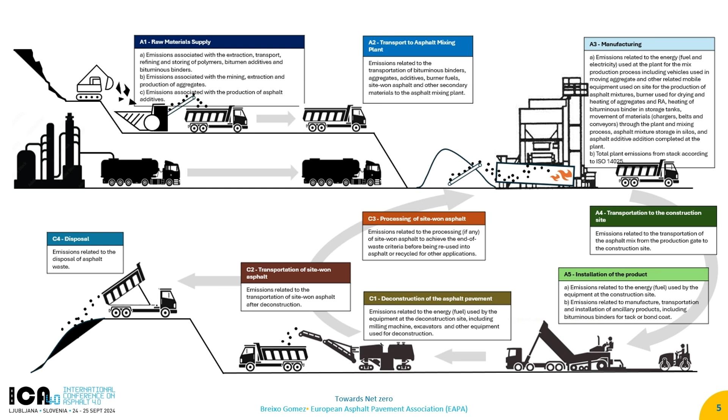What we haven't included is because at the moment we don't have provisions about the impacts of the use stage, so impacts of maintenance, service life, and these kinds of things. This we haven't included in this study. And it's a pity, because honestly, I think that digitalization is one of the areas where it could contribute the most.

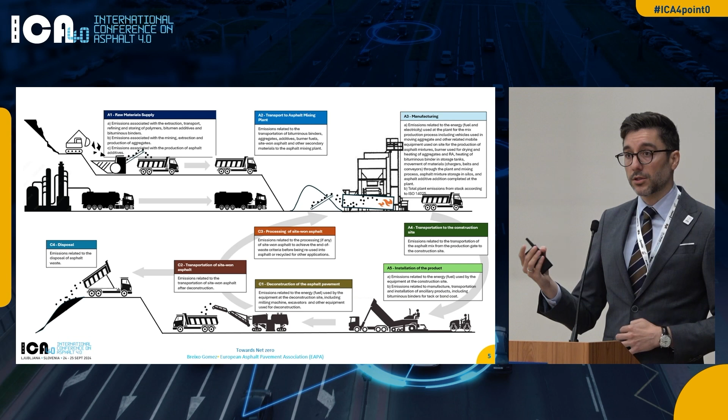Have pavements that have more quality, so extended service life, and optimized or reduced maintenance. For example, with technologies like we saw from XOUBA, using data from vehicles to optimize maintenance. So all these kinds of impacts are in the EPD terminology, module B, and unfortunately we couldn't include it here. Still, we will see that digitalization can help in other areas of this service life.

Something important is that at the moment, the results show that the production of asphalt mix, up to the gate of the asphalt plant, to produce 1 ton of asphalt on average in Europe, we need around 50-55 kilos of CO2. And if we include impacts beyond the asphalt plant, so transport, installation, and end of life, then we are around the value in red there, around 65 kilos of CO2 per ton of asphalt.

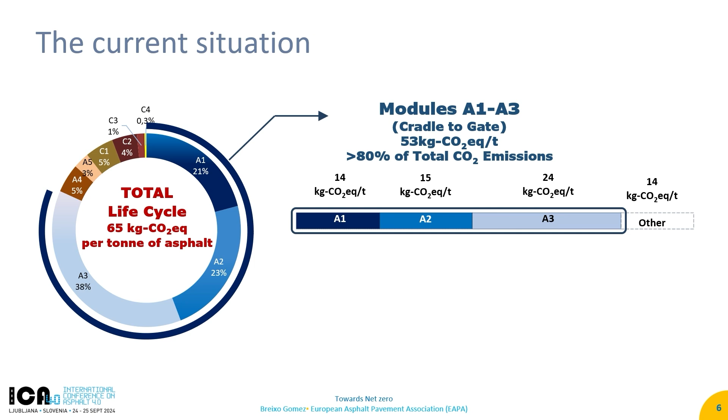Something important is, if you see just modules A1, A2, A3, this cradle to gate, this 50-55 kilos represents already around 80%, or actually more than 80%, of the total CO2 emissions. This means that everything we can do to reduce emissions during manufacturing and raw materials is already going to be tremendously impactful. It's going to be good to reduce emissions, and this is why we focus more on that.

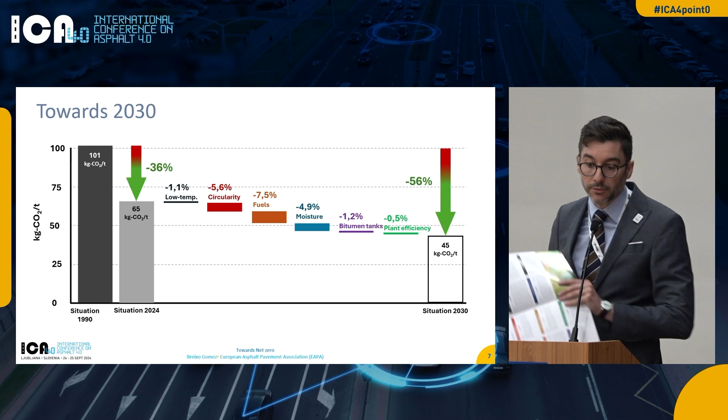So as I said before, knowing where we were, the first column, and where we are now, we see that already we have a reduction of 36% nowadays. And then where we have to be in 2030, we found a combination of levels of implementation. I won't get into a lot of detail because everything is in the document, and I really encourage you to have a look at that.

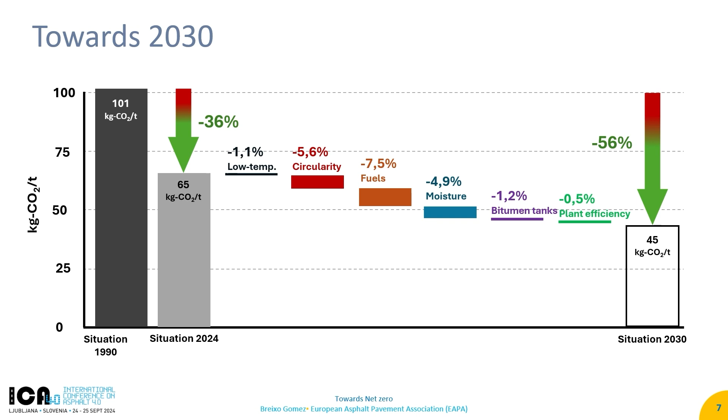We found a combination of different technologies that are feasible for 2030. For example, here we haven't included use of electric trucks or things like that, probably we won't have in just 6 years, or at least it won't be the main case in Europe. And then we repeated this for 2050, and there we did include more things that we are expecting to happen because it's a longer wait.

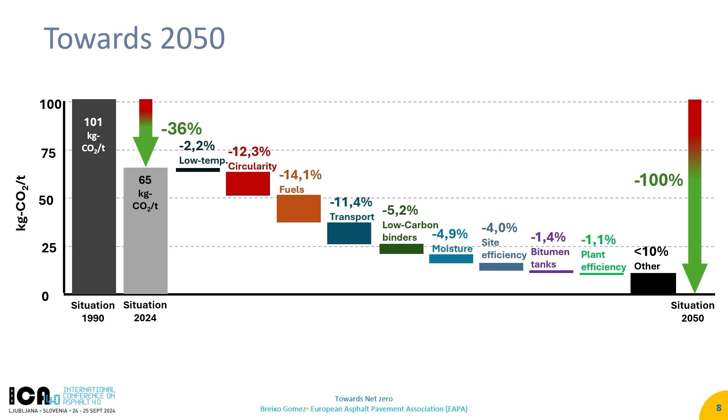So, and if we see this, again I won't get into a lot of detail, but where could digital technologies impact more on this? What we think is especially to make the asphalt plant more efficient, to make the transport of materials more efficient as well, and to make the operations on site also more efficient.

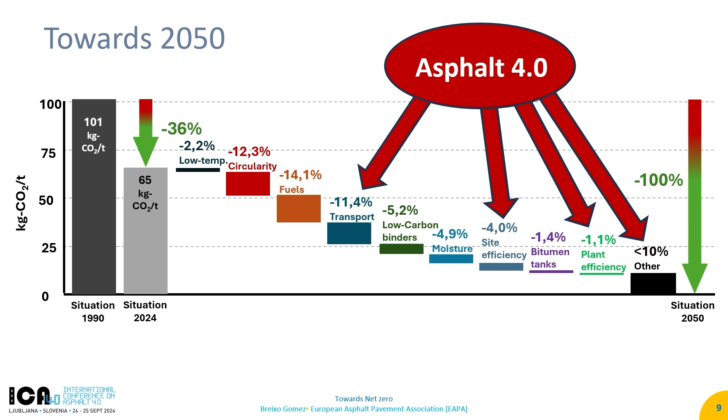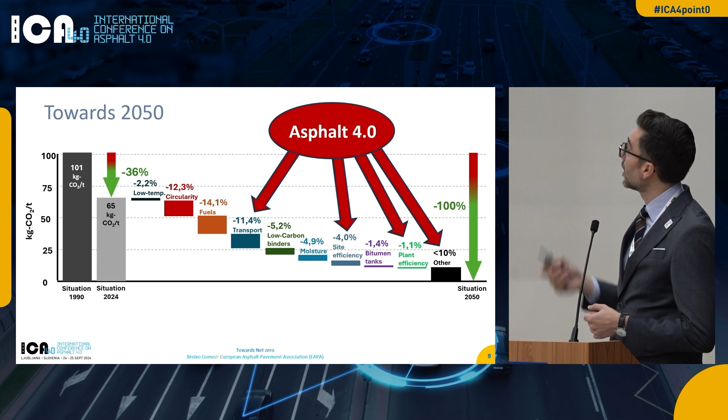Also, we have this section of other, because our objective was to reach our emissions reduction at least 90%, because we consider that there will be a 10% that will be covered by other things that we haven't included in this study, but that will happen also over this time. For example, the reduction of emissions to produce electricity or this kind of thing. So it's not something we will do in the asphalt plant, but it will happen somehow, and it will help. So digitalization also has potential to act in this.

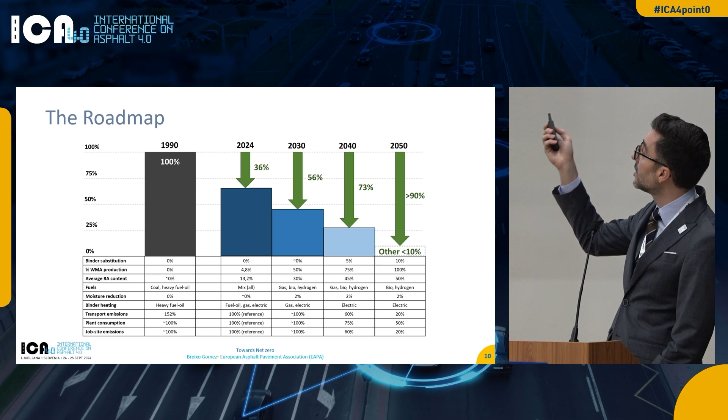This is the roadmap, I invite you to have a look at that. So this is how in different years the levels of implementation of different technologies progress.

At the end of the document, you will also find, for example, some sections where we say that there are impacts that the road can produce that we cannot show in the EPD. For example, we know that through maintenance or the selection of an optimized low rolling resistant surface for pavements, we can actually reduce emissions from the cars. So this is not something we will show in our EPD because it's not emissions coming from asphalt, but it's something that can contribute to decarbonize other sectors, like the transport sector, one of the most emitting sectors, by the way.

And we also have a call for stakeholders to help us do that. So it's a call for ourselves, for the industry, to develop a series of things. A call for the administrations, and here we talk about regulations, standards, sharing risks, sharing responsibilities, green public procurement, all these kinds of things. And then also a call to other third parties, for example, to decarbonize energy production, to decarbonize transport. We need decarbonized vehicles for transport, for example, or to supply raw materials that have lower impact, so from the binders to aggregates, etc.

So I invite you to have a look at that.

Traditionally, road geometry is measured with a standardized approach using a mobile platform containing an odometer, an angular transformer, and an accelerometer. These three components usually serve to calculate the IRI factor, the roughness index, but they can also be used to estimate the profile along the road, so the longitudinal profile. This is a one-dimensional approach, but since the platform is moving, we can also do it under traffic.

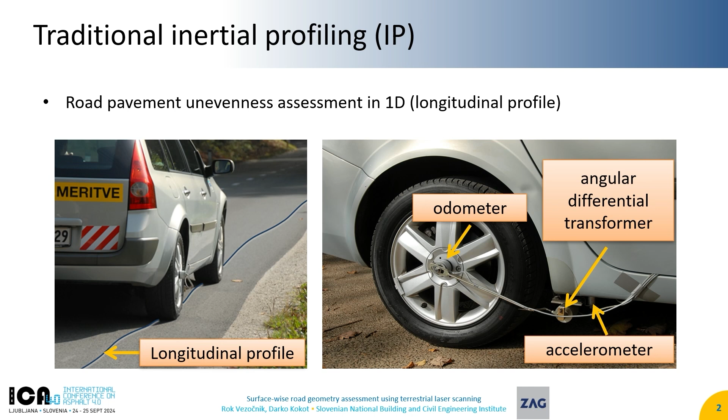Compared to this 1D approach, there is a relatively new technology developed in the last 10 to 15 years, laser scanning, or as you may know it, the LiDAR approach, which uses an instrument with its own lighting source.

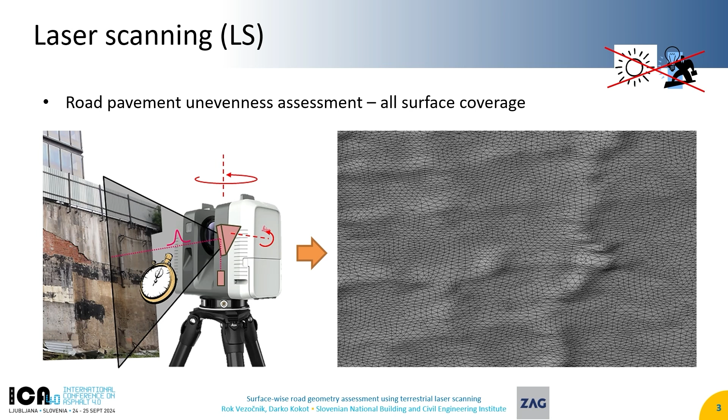It does not require an ambient light source such as the sun or anything else. It can also operate in total darkness. So basically it works like this.

On the left side you can see the instrument. It has a laser source - the smaller red square. The laser emits different pulses, and through a very sophisticated mirroring and rotating platform, these pulses are sent out into the environment, reflected, and returned back to the instrument. This is done very fast, and the instrument measures a huge amount of spatial points, measuring spatial angles and the distance to the object.

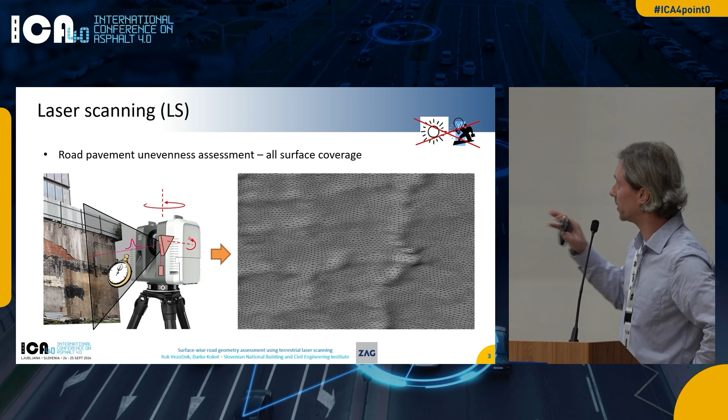With such an instrument, one can obtain a very precise, dense, huge amount of points, which we call a point cloud. On the right side, you can see an example of a zoom in on a road surface with all the bumps. This is not a point cloud, it's actually a mesh - a triangulated mesh, which was obtained by this type of system.

Additionally, the instruments also measure the intensity of light and the RGB values if the instrument has a camera on top of it or inside. These are all information that you can get within a couple of minutes. The next three steps - synchronization and transformation, filtering, and surface modeling - are not so well automated. They need human intervention.

With synchronization and transformation, I refer to the fact that these instruments are not able to see behind obstacles. That means you have to place additional stations with the instrument in order to completely cover an object that you are investigating. This synchronization refers to having to then synchronize these different locations within one common coordinate frame, and then you place it in the final coordinate frame - some local coordinate frame, or even the one that individual countries use.

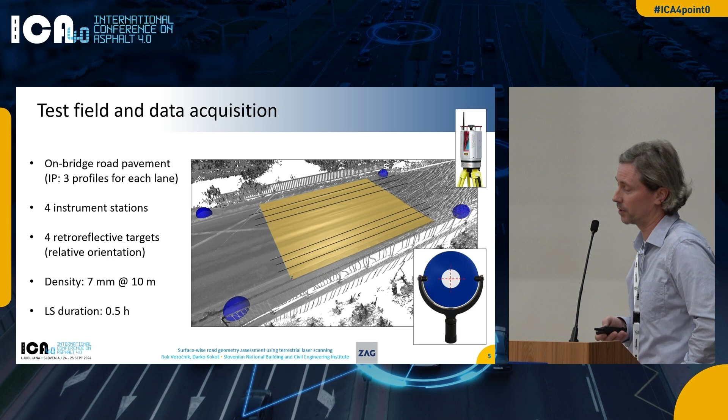In this short presentation, I want to also tell you that we carried out a small test very close here to Ljubljana, in which we measured a small section above the bridge with the traditional profiler. You can see the 6 black lines - these are the lines in which the inertial profiler was measuring the road.

We also scanned this area from 4 different locations, seen here with blue dots, to combine different locations. For these 4 different locations, we used retroreflective targets. This is standardized equipment, and we chose the highest density with this Riegl instrument, which was available.

This is quite an old experiment. Nowadays, you can have instruments that are able to produce even denser point clouds than this one. But the density that we chose was 7 millimeters in both directions at the distance of 10 meters, just to give you an idea. The whole campaign took half an hour, including the drive with the profiler. Our aim was to see whether this terrestrial laser scanning, being a surface-wise approach, can be beneficial compared to the one-dimensional inertial profiler.

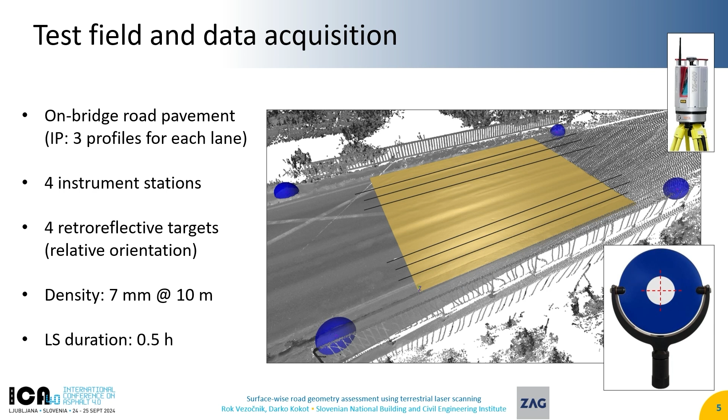So from the laser scanning point cloud, we first did the steps which I already described. We placed the point cloud in the coordinate frame, and we filtered out the traffic because this was done under traffic conditions, so we had to filter out the cars and all the silhouettes that the traffic was producing.

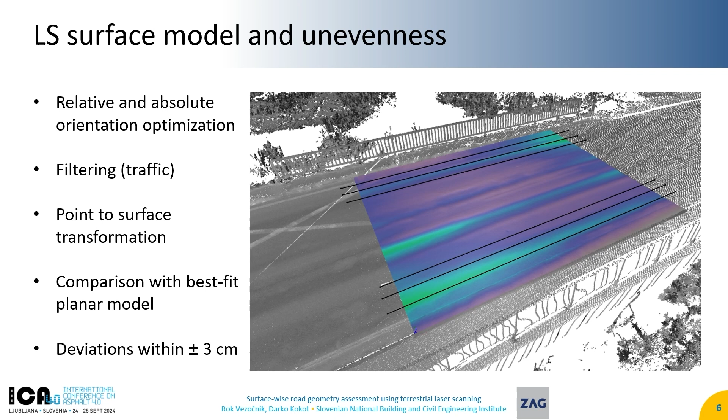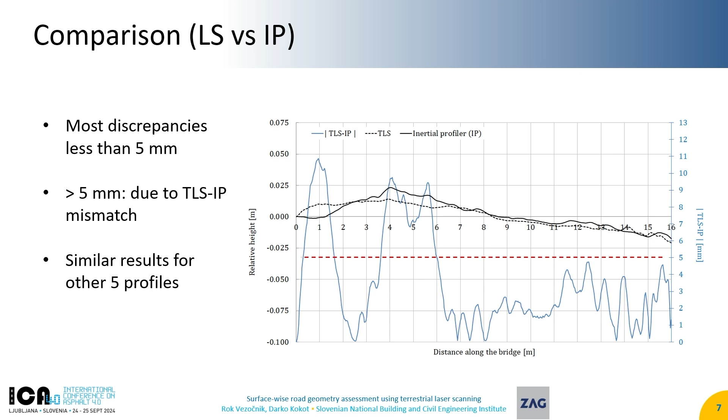Based on these results, we have decided that it's quite useful to have this kind of full surface coverage results, because they are quite reliable and can be used for different applications - for example, some complex simulations, one of which I show here as a reference.

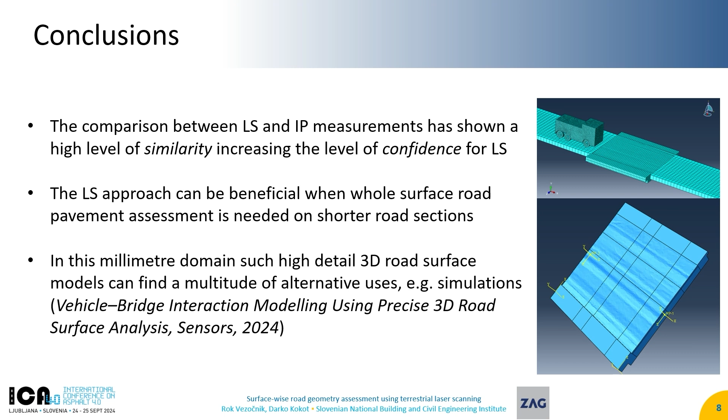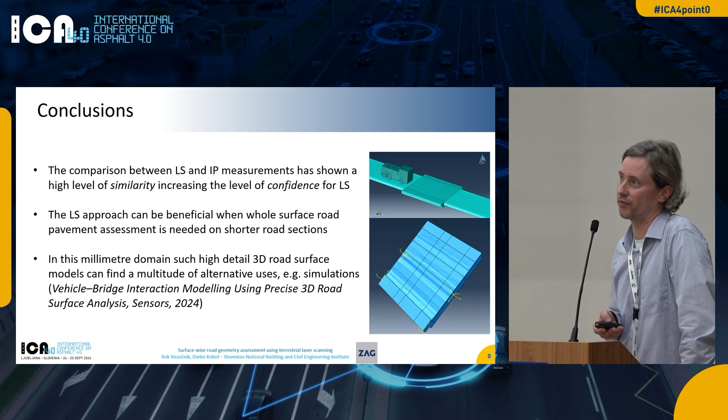We produced an article which used this very precise road model from the laser scanning in simulations of how the vehicle crosses a bridge, and how, because the bridge is equipped with sensors, it also measures the response of the bridge when the vehicle is passing over. This simulation was done not with a simple road model, but with this kind of sophisticated model. So in the end we have managed to show that for shorter road sections, since this is a static laser scanning, such models can be used not only to be in the same quality category as the inertial profiler, but they could also be an advantage when trying to perform more high-level tasks or comparisons of monitoring road geometry.

So that's my talk, I guess. If you have some questions, I will gladly answer them.

Otherwise, I don't want to be too long, because I think we're supposed to be 10 minutes or so, right? Yes. Is there any question? Please. No questions? Okay, well, maybe Andrew can have some time.

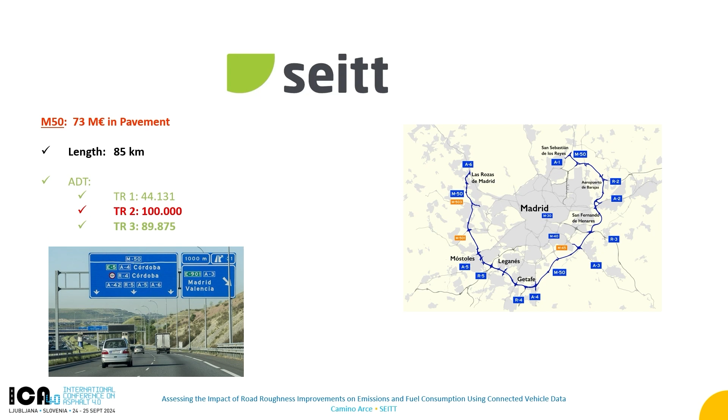As you can see, 85 kilometers, and the AADT is almost 100,000. That's plenty of traffic. If any of you go to Madrid, you will see there's plenty of traffic, a lot of traffic jams in the morning and in the evenings, as people travel to their jobs and to their houses. So it's a really important network.

So what is the process of this project? First of all, this summer they did the pavement works. So we first have to segment the road, then do the data collection. Well, technically the data is in the cloud, so we only have to access it.

Then we have to estimate the fuel consumption and CO2 emissions. We say estimation because we don't have the complete fleet, but when you have the data, you calculate, you don't estimate — so we calculate the bias that we have.

We are collaborating with the Spanish traffic entity, DGT. They put some traffic counters that read the plates of the cars, so we know the ground truth. Technically, we know the real traffic of the roads, and also we know the type of engines they have, if they are hybrid, petrol, or electric cars.

So we have the bias, that is our connected vehicle data, and we have the ground truth, so we can compare what is happening in one and the other. Then we make the analysis, and finally the before and after comparison.

Sadly, they finished the works less than a month ago, so we don't have the after results, but we hope they are going to be really good. So we are going to focus on the before analysis.

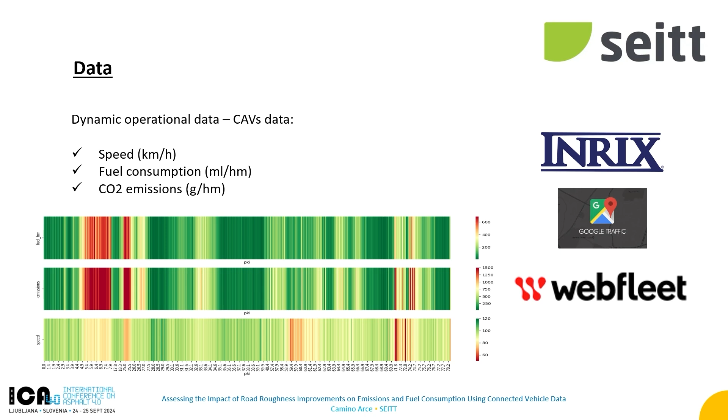Europe is making a huge effort to know the emissions, and the cars know what the emissions are at each moment. So when you accelerate a lot, you are making the world a little bit darker, but we are trying to achieve better. Then in the lower part, we have the speeds. I think most of you will see where we have less speed, we have more greenhouse gas emissions, and also more consumption.

When we go faster, it depends — I'm going to make some assumptions — but when we go faster, we have less fuel consumption, so we make less greenhouse gas emissions. Okay, so this is the part that is coming from the car.

As the road manager, you cannot change that. The cars are where they are. The speed people are going, you can limit the top speed, but when there is a traffic jam, you cannot tell them to go faster. They want to go faster, but it's impossible. So that's the car information, that's the ground truth that we have in a bias. Not all cars have the information, but at least we have what is really happening.

We don't make any calculation or estimation on fuel consumption or greenhouse gas emissions. Then the part we can work on is the roughness, the surface. That was the IRI, let's say almost IRI. We don't want to fight in that battle, but this is going in each direction. You can see where the IRI is really good, almost 0, and where it's really bad, let's call it, over 2.

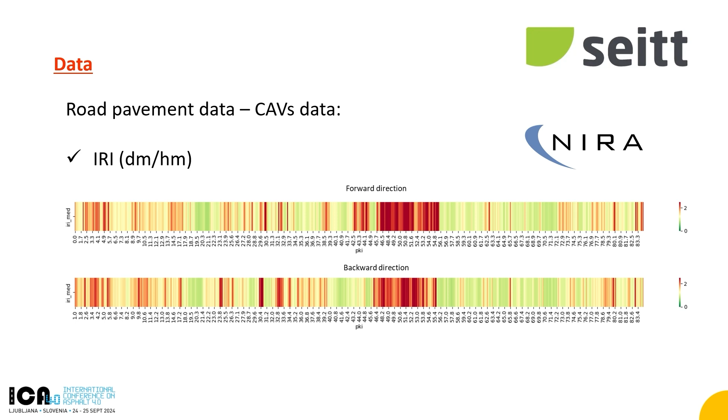That's not a lot, but like there is a highway and plenty of traffic, we are making the comparison. So we are in August. They have finished this work. In the next workshop, I can show you how it is paved and how it improves the roughness of the road, but this is the before. They did a really good job with the asphalt we are working with in this project. They made a big effort in August to make this the best they could.

So the objective of the project is to evaluate the environmental impact of repavement. They are making a huge investment, and it's not only for comfort, traffic jams, or safety, it's also for the emissions. That's the topic we are already focused on. The good thing is we are really having a calculation on the real truth, because I think everybody in this room thinks a better road makes less emissions. So we are making the calculations on it.

The insight so far is that traffic, speed, and emissions are very correlated. As you can see in the last graph, we are not accounting for the geometry of the road because it's not changing. So that's something stable, and we're not making a study on that.

And the expected results are: improved pavement condition leads to reduced greenhouse emissions. That's the objective. Also, if we improve that, we are making less travel time because the speed is going to be higher, but not too much higher, just a wave of people traveling at the same speed. So when people are traveling at the same speed, there's no traffic jams, there are fewer accidents. So that's another way we're going to try to achieve or study what is happening on the road.

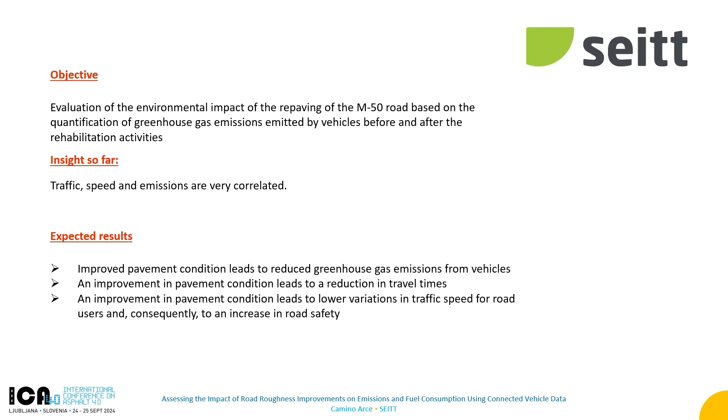This is good. Any question, anybody? No questions for Miguel? Please. I don't know if, yes.

Thank you for a great presentation. I just had a question on how you measure fuel consumption. Is it a special vehicle, or do you just hack into the regular car?

Yeah, we get into a regular car. Our car is connected. It sends your location, your speed, your wipers, which radio you're hearing. So it also sends the sensors of the car, not all of them, the fuel consumption you are making at the moment, and also the emission you are making at the moment. So we have a point, depending on the provider, every 3, 5, or 10 seconds. So we interpolate and we make the trace of the car.

And another question, have you tried correlating it to noise levels? Not yet, we will make it, but we are focused only on roughness. Okay, thank you, any other question?

Because I actually do have a question after seeing the first two presentations. We are seeing two different approaches. On one hand, we see a very accurate measure done by a laser on a specific road section. On the other hand, we have an estimation of the IRI based more on big data, not so accurate, but it's more an estimation based on data coming from vehicles, but with that we can cover a big network and do it more in real time monitoring. So it's like opposite approaches. My question is, will we need only one in the future? Will we need both? Will it be complementary? I don't know how the speakers think about it, or also people in the room. So maybe we start with you since you are there.

Because I'm an expert in structural engineering, I will say just a few words about bridges, and a few motivational pieces of information. Bridges are rapidly aging, and Slovenia is no exception. For example, by the end of this decade in Slovenia, nearly 40% of bridges will be more than 50 years old, and 50 years is a milestone in the design of a bridge. So it's really good to know what the future will deliver us in that sense.

Then, of course, there's traffic, something we are experiencing. Traffic is growing, and if only half of these future speculations about the growth of traffic come true, I cannot imagine how I'll commute to Ljubljana, or you to your places, wherever your situation is.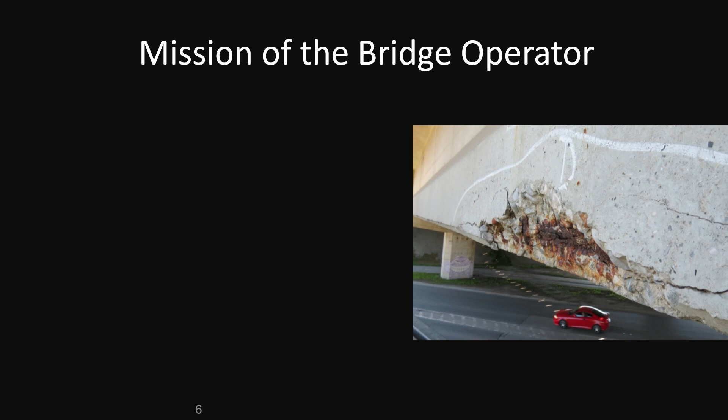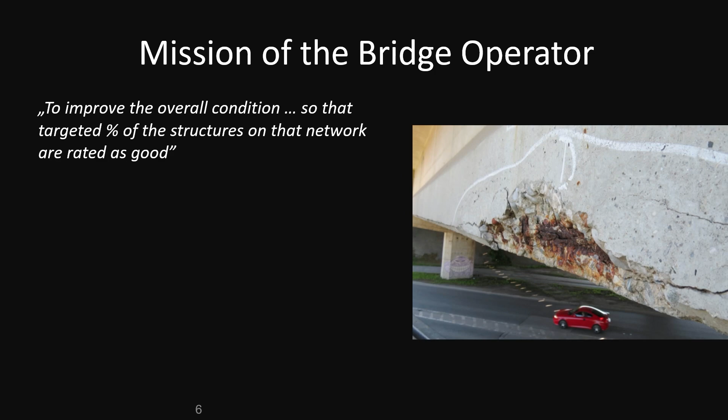Now I'd like to share the way I see the bridge operator's mission. Ideally, he wants to improve, and when he sets his goal, maintain the overall condition of the bridge network he's responsible for. The question is, what is a good bridge? And how can we measure what is good? And lastly, when do I need to act?

Here I'll show you, this is a really old currency nowadays, it's the Slovenian tolar. We never have enough money. Even the richest countries in the world do not have enough money to maintain their infrastructure. So this is de facto.

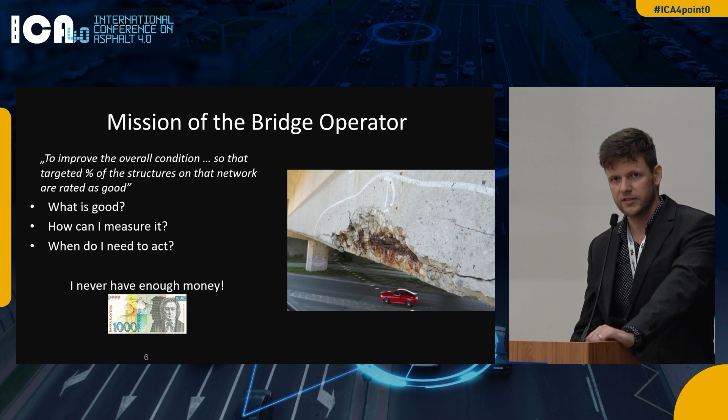The way I see bridge assessment can be linked with 3 really important characters in this process. I like to show this because I'm sure a lot of people have seen the blockbuster Hangover movie, which has 3 interesting characters. Each of them is not as interesting as their interaction and combination within the movie, and this is the same way I see the bridge assessment process and what is the ideal trio.

The first thing is the bridge inspector, or the bridge inspection. This is the first front line to get information about the quality of the structure, in our case, the bridge. That is, let's say, the leader of that bridge assessment process.

If that leader identifies that something is not going right, he then prescribes monitoring. Just taking pictures of some damage every month is already monitoring by my definition. But monitoring can be really complicated, like this guy in the movie.

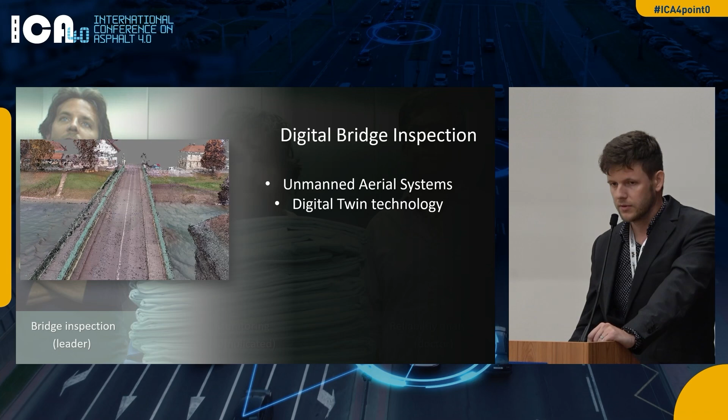Here is a movie showing our first experience, nearly 4 years ago, about how to use some digital data and extract information.

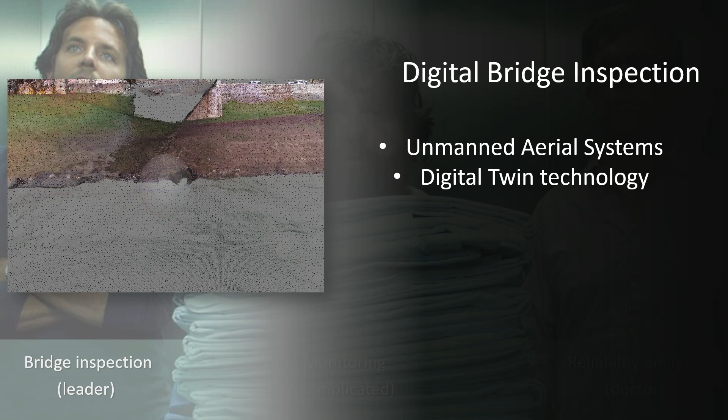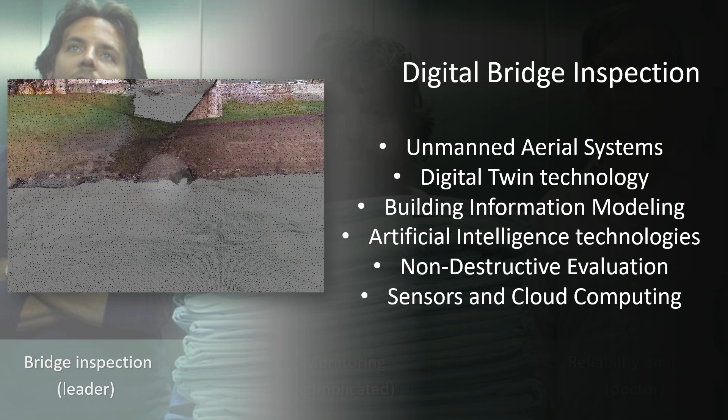Across different projects, I can list a few bullets which are relatively in line with digital bridge inspection: drones, digital twin technology, BIM, AI, and non-destructive evaluation—something that is really old—and of course sensors and cloud computing.

By some definitions, all these technologies or solutions can go into the bucket of digital bridge inspection. But let's say a few words about how it is in Slovenia and what our experience is. The traditional inspection, the way we feel, has its biggest issue creating traffic delays because of our process. We need partial closures, and people are not happy when you have closures.

Because it's just additional commuting time. The way I understand it, when people do not know anything about bridges, then our work is very nicely done. So when people are aware there are bridges, then something is wrong.

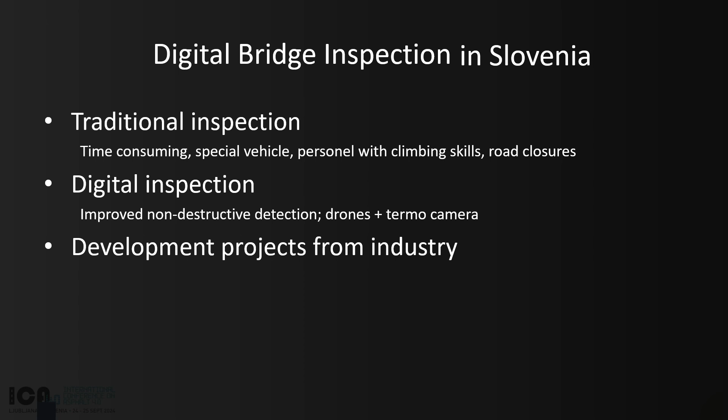But in digital inspection, the idea was to try to use drones and see how they can be applied to our current solutions. We successfully completed 3 development projects financed by the Slovenia Motorway Company and Slovenia Infrastructure Agency, starting in 2018 with the first project.

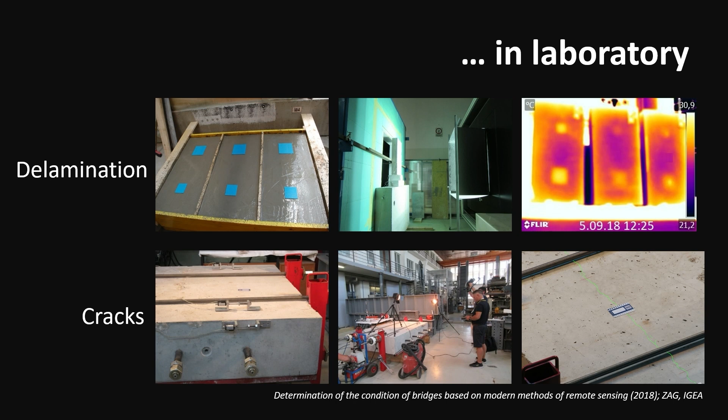We started in the lab, and then we went into the field. In the lab, we produced a mock-up concrete box where we simulated delamination of the concrete cover. We used thermal cameras to see how we can detect this kind of damage. We also simulated cracks and used AI machine learning algorithms to detect cracks on those concrete blocks. Of course, real bridges are something completely different.

So we have experience from 7 case studies on bridges in Slovenia, where we focused on concrete structures. These are the 3 most usual damages: cracks, delamination, and corrosion.

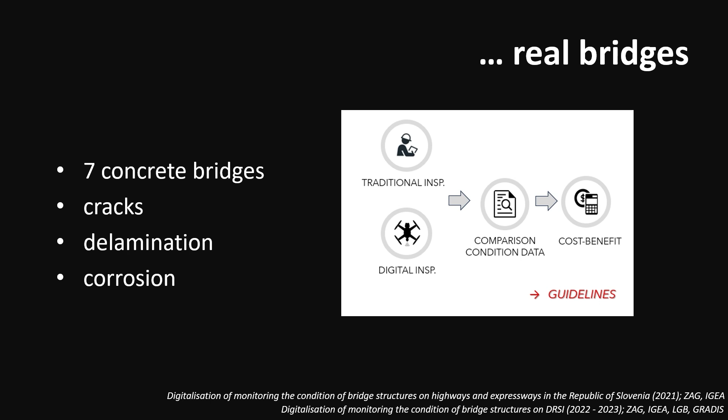The idea was to look at traditional inspection and also find what was, at that time, the best digital inspection upgrade that could be a compromise between cost and effectiveness. In the end, together with contractors, we proposed some guidelines for the next steps, how to proceed in the near future.

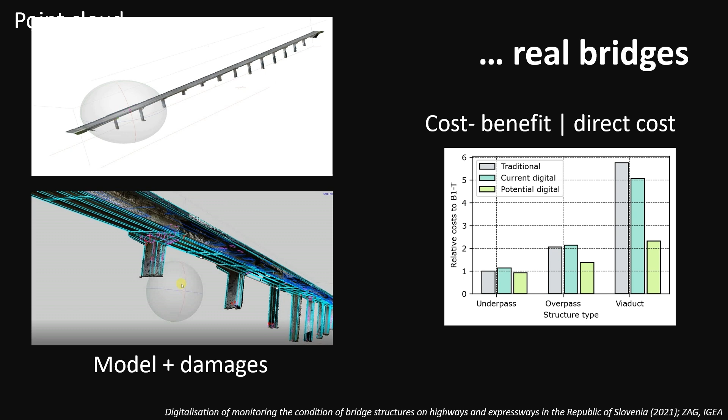Here are some photos of models with damages, and in the end we did a cost-benefit analysis. If we only considered direct costs, it's important to also consider the future. But if we were to also calculate indirect costs, the solution already makes sense to use now.

So this is regarding the digital bridge inspection. Now let's say a few words about the development. This is my personal opinion.

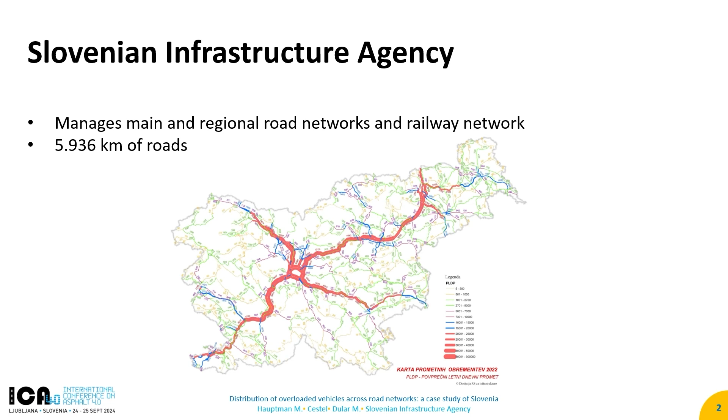First, a couple words on the agency itself. The Slovenian Infrastructure Agency manages Slovenian regional and main roads, as well as the railway networks. If you look at this map, you see the thick red lines - this is the motorway network in Slovenia, managed by the motorway company. The rest of the lines, yellow, purple, and green, are the main and regional roads which connect regional centers in Slovenia, the larger centers of population. All in all, there's about 6,000 kilometers of main and regional roads in Slovenia.

Now a couple words about weigh-in-motion. One of the tools that the Slovenian Infrastructure Agency uses to manage their infrastructure are weigh-in-motion systems. Generally speaking, these are systems which weigh vehicles while they're traveling at normal speed. The alternative would be static measurements of heavy vehicles or low speed weigh-in-motion systems. High speed weigh-in-motion systems have a huge advantage over statically weighing vehicles, because you can weigh a lot of vehicles without needing to stop them. When we talk about high speed weigh-in-motion systems, there are two types.

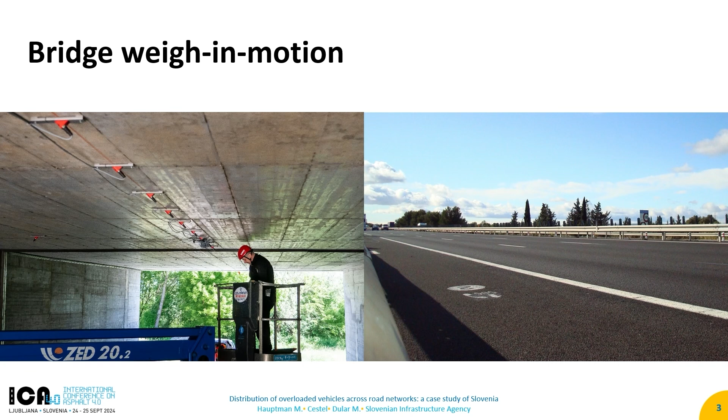One type are conventional road weigh-in-motion systems, or pavement WIM systems. With these, the sensors are cut into the pavement - you need to cut open the pavement, install the sensors inside, and then resurface it. The second branch are bridge weigh-in-motion systems, where you install the sensors on the bottom side of the bridge - bridge is in the name of the system, so you basically use the bridge to weigh the vehicles. The advantage of bridge weigh-in-motion systems is that they're completely portable, and you also gather structural data on the bridge itself.

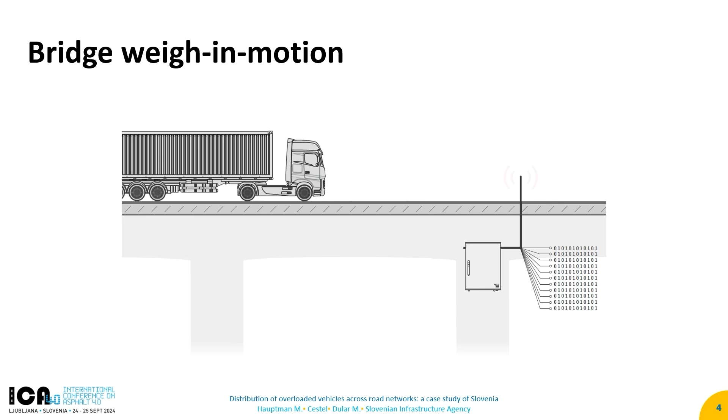Here is a simplified animation of how these systems work. A heavy vehicle passes over a bridge, the sensors below the bridge detect each axle of the vehicle, they detect the signal from each axle, and then the algorithm of the system gets the data from those signals, interprets them, and extracts the useful data.

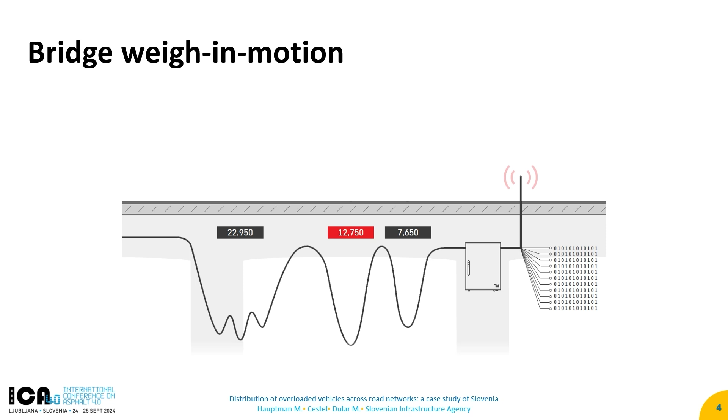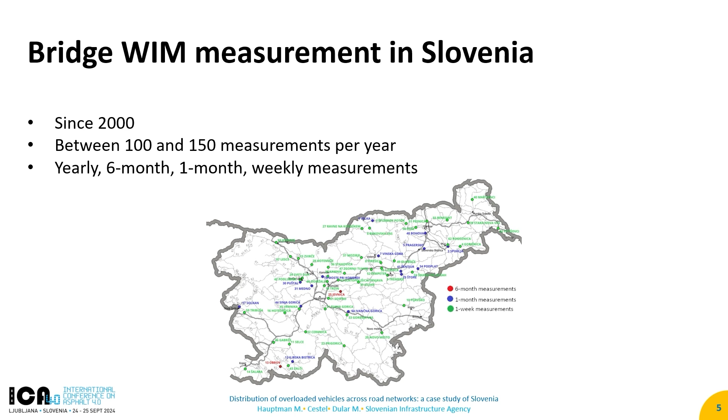In Slovenia, we've been doing bridge weigh-in-motion measurements since about the year 2000, and each year we do between 100 and 150 of these measurements. Since bridge weigh-in-motion systems are portable, we talk about the unit here as a measurement. Some of our sites in Slovenia are permanent, mainly on the motorway network, but the majority of measurements are temporary, lasting anywhere from 6 months to only 1 week in duration. These dots you see here are the measurements that we've written about in our article.

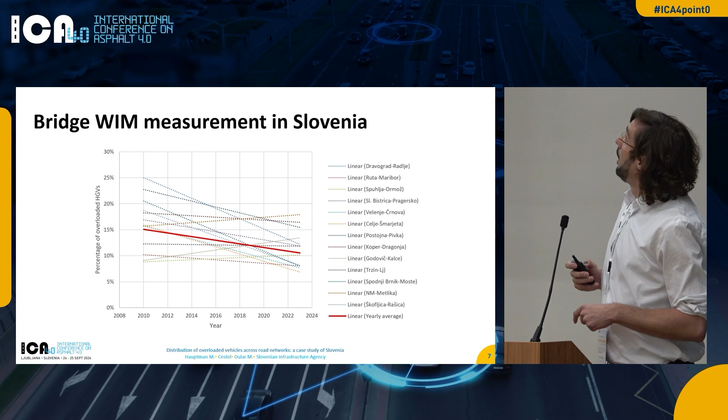Here is this same graph, but it's a bit cleaned up, showing linear trend lines. All in all, you can see that the Slovenian Infrastructure Agency is incredibly successful in reducing the percentage of overloaded vehicles. In 2010, there was about 15% of overloaded vehicles on their roads, at least on these road sections. Last year, it was between 10 and 11%.

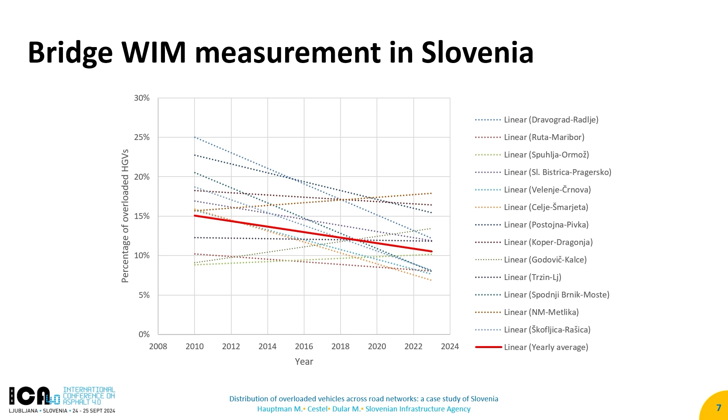Now we'll take a closer look at the most recent data that we have from 2023. The article we've written for this presentation was based on 62 measurements, one of the projects we did with the agency. As I said, these measurements varied in duration from 6 months to 1 week, with the majority being 1 week in length.

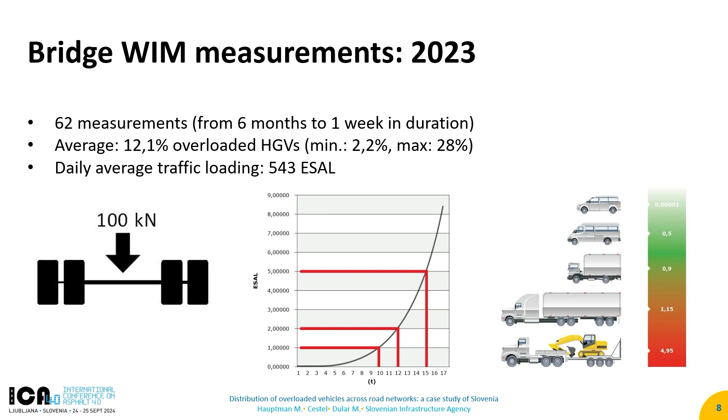The most basic data is just the average percentage of overloaded vehicles. Last year, this percentage was 12%. But as I said, this varies significantly. We had a location near Ljubljana where only 2% of vehicles were overloaded, then a location near one of the industrial centers in Slovenia where almost 28% of vehicles were overloaded.

So the percentage varies. The second concept I want to introduce is traffic loading. This, in my opinion, is the most important piece of data that infrastructure owners get from weigh-in-motion systems. I will briefly introduce this concept. Traffic loading is measured with the unit ESAL, which stands for equivalent single axle load.

This concept was devised in the United States in the 1950s when they conducted a series of road tests investigating the connection between axle loads, axle configurations, and road damage. So they introduced the concept of the standard axle. Here on the left, you can see the standard axle in Slovenia: a single axle with double tires and 100 kilonewtons of axle load. This axle is by definition defined as 1 ESAL.

Now, 100 kilonewtons equates to 10 tons, but let's say this axle had a burden of 15 tons. Then it wouldn't cause 1 ESAL of road damage anymore, but 5 ESALs of road damage. So this same axle, just with a larger axle load, causes 5 times as much damage as it did with the 10-ton axle load.

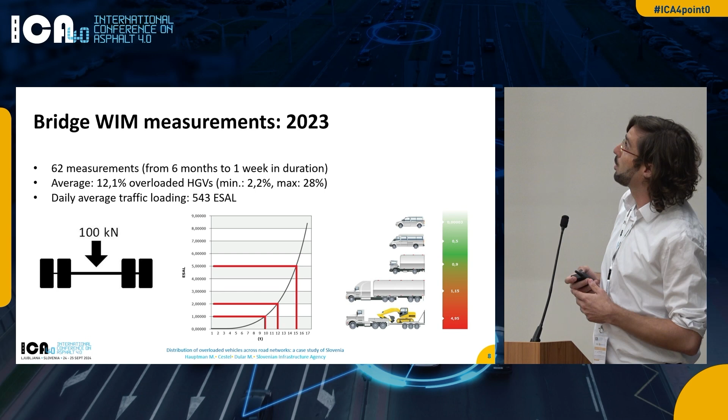Just for information, in Slovenia, on these 62 sites that we based our article on, the average traffic loading was 543 ESALs per day. This was the average daily traffic loading.

Now I wanted to show you two interesting pieces of data from last year's database. The first road section I wanted to show was one where we detected about 240 heavy vehicles per day on average, and more than 26% of these vehicles were overloaded, which is, of course, a very high percentage.

But it turns out that ESALs per day, the daily traffic loading, was not even that high. It's 223 ESALs per day. Now, why did this happen? This happened because this road section has an axle load limitation of 8 tons.

So legally speaking, many vehicles here were overloaded because they were loaded normally, abiding by the 10-ton axle load limit which applies on normal roads. But because of the axle load limitation on this section, legally speaking, these vehicles were overloaded. Of course, that axle load limitation was there for a reason, so this traffic loading is too high for that road section.

The other thing I wanted to point out is something we at CESTEL see pretty much all across the world. Let's say you have a two-lane road with opposite traffic, and one lane has substantially larger traffic loading than the other. This happens because you have fully loaded or overloaded vehicles driving in one direction, and then these same vehicles return to where they came from empty.

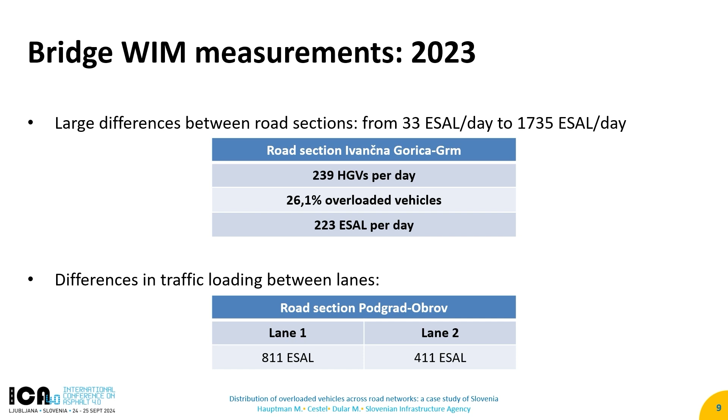Up until now we talked about theoretical concepts, ESALs, and statistics, but I wanted to show you why this happens in reality. So I took photos of 3 vehicles that our system captured driving on these roads. These 3 vehicles represent very nicely where the problem is. All of them are driving on regional and main roads in Slovenia, but in fact you will see these vehicles all across the world.

They are severely overloaded, because the maximum allowed gross vehicle weight in Slovenia for normal transportation is 40 tons. Of course, they're so severely overloaded that axle loads are also severely across the limit. Such vehicles are the main reason why our roads are destroyed.

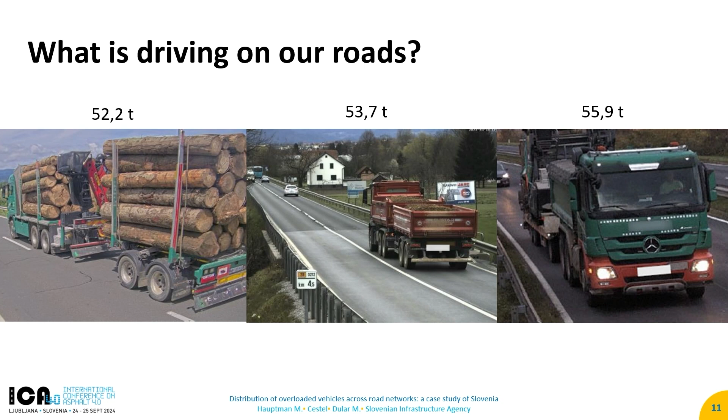Going a bit more into detail, the first vehicle is a timber lorry. These are very characteristic vehicles in some parts of Slovenia, and this is very much seasonal transportation. So for about 2 months a year you will see these vehicles on the roads, but for the rest of the year there won't be any heavy traffic. Statistically speaking, you might say we don't have a problem with overloaded vehicles because for much of the year there is no problem. But in that short period of time, you can have a large number of these vehicles, which are very detrimental to the road.

The second vehicle is a vehicle from a construction site. This is a typical vehicle everywhere in the world, and these vehicles are very often extremely overloaded. The third vehicle is an exceptional transport without a permit. These are also types of vehicles which can be very problematic for road sections.

Just a couple of final thoughts. I hope I showed that systematic monitoring of heavy vehicles works. The Slovenian Infrastructure Agency managed to decrease the percentage of overloaded vehicles on its roads since the year 2002. They had more than 20% overloaded vehicles, now they're closing in on about 10%.

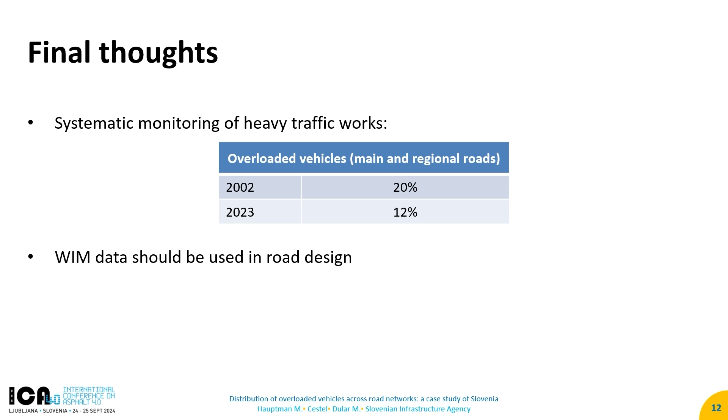This is just a simple table, but behind these numbers is a lot of work by people from the Slovenian Infrastructure Agency and the motorway company in Slovenia. They also cooperate with the Slovenian police, which enforces overloading rules. I also have to mention the Slovenian Agency for Traffic Safety, which tries to educate truck drivers and trucking companies on why overloading is bad, because it turns out many times they simply don't know, they don't have the knowledge on why they shouldn't be driving overloaded vehicles.

The second point I want to make is that wherever possible, weigh-in-motion data should be used in road design. We at CESTEL do measurements all across the world, and I can say that especially in Western Europe, road infrastructure owners are very sure that they don't have a problem on the roads, that there isn't much overloading. But overloading is problematic everywhere in the world. So whether you're in Germany, the Netherlands, or Indonesia, you have a lot of overloading.

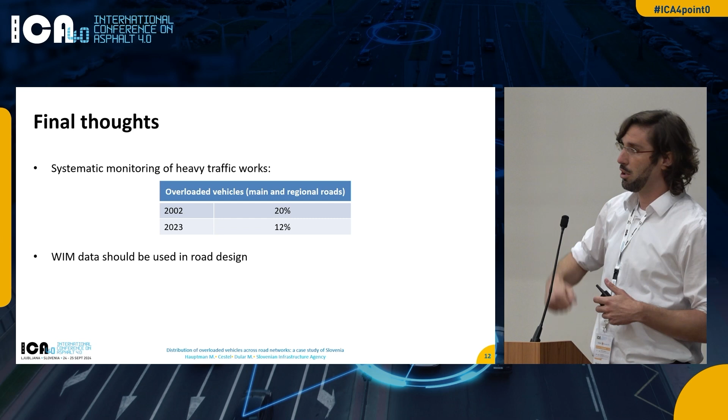Like I said, I hope I showed you through the presentation that overloading is especially problematic on roads of lower categories - main roads, local roads, regional roads - which have not been designed for high traffic loads. Thank you very much.

So, any final questions? Yes, there's one. There's one at the end. I don't know. Yes, have it. Good. Hello.

Hello, I would like to ask you if you can tell me the accuracy of measurement in percentage. Then, if this technology can be used in industry, and if you can maybe say something about the technology used and how the measurement is done.

Okay, so the accuracy levels - we usually say that the accuracy we achieve is usually between 5 and 10%. It depends a bit on the quality of the road surface and the quality of the bridge, but we are in the range, like I said, between 5 and 10%.